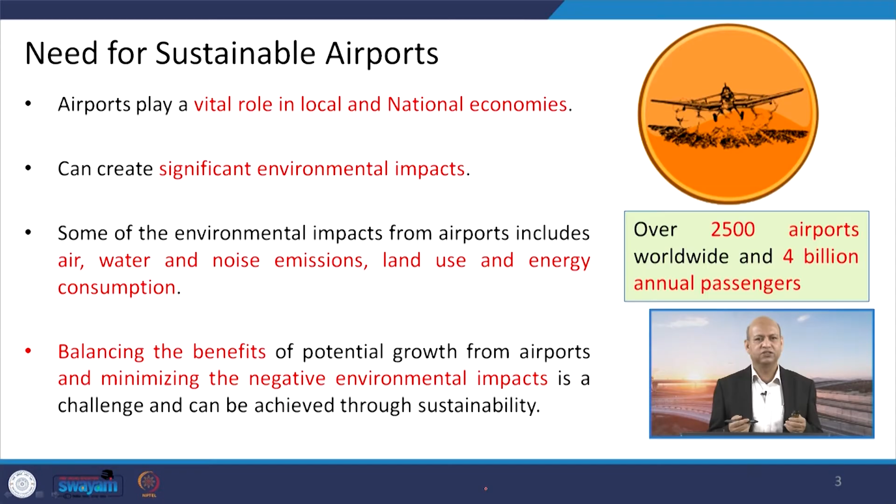Then what are the benefits? Of course they contribute to the economy, as goods and passengers are transported, so there is a constructive role in economics, but at the same time there are risks in terms of negative impacts. So we have to see the balance, a kind of risk-benefit analysis or risk-gains analysis, you can say.

If we want to see the environmental impacts in totality: congestion in nearby areas, because if the feeder system is not good, if approaching roads are not good, then at peak hours when people are travelling towards airports or from airport to their destination, there may be congestion in nearby areas. This congestion results in a lot of fuel burning, emissions, deterioration of air quality, and economic loss because of fuel burning.

Then waste handling, because wherever human activities are concentrated at a particular center, a lot of waste will be generated. There will be so many facilities like restaurants or restrooms, etc. So whether it is liquid waste or solid waste, there will be several waste streams, and we have to handle those waste streams properly.

Land use by airports requires huge land, several kilometers for air traffic, parking as well as runways, and then there are godowns or warehouses, and hangars for the airports. So many facilities, arrival or departure joints, and all those dimensions are there for a complete airport station.

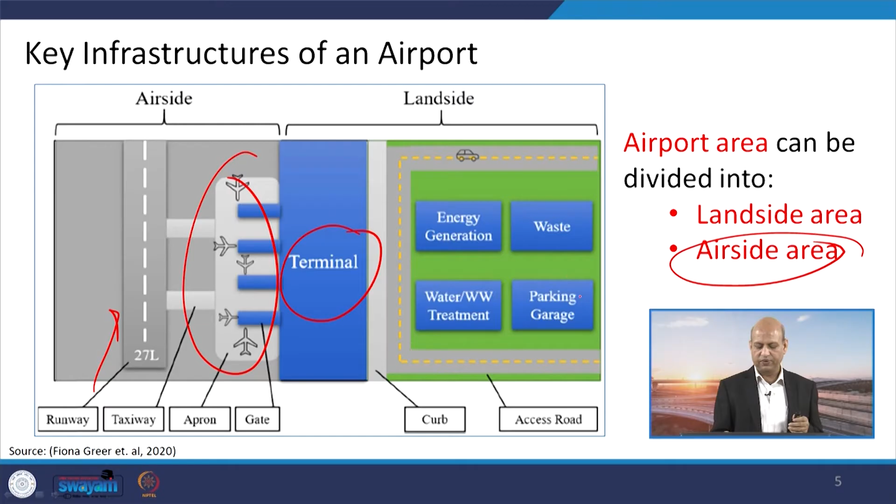If you see the key infrastructure of an airport, we can divide it into terminals, and then the airside area, where aircrafts are parked and passengers go inside or come out, and then there is the runway. And the landside area, where facilities are there for parking, waste handling, energy generation, and water and wastewater treatment - all those things are there for landside areas.

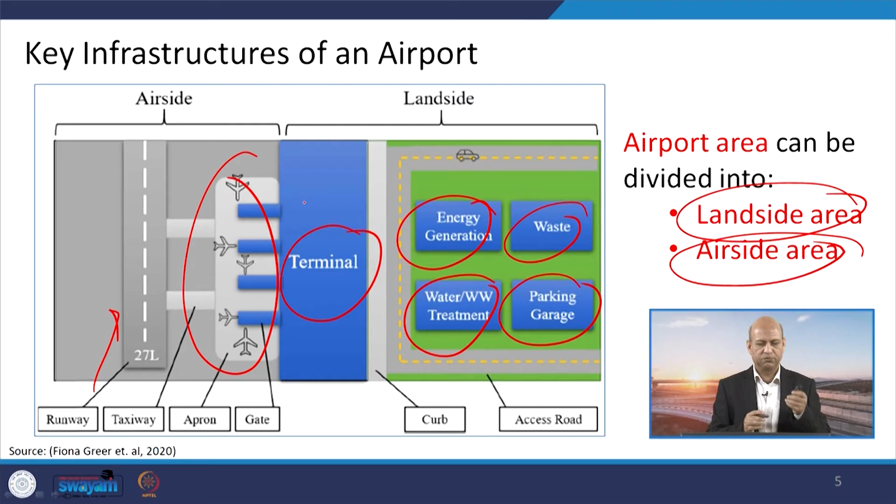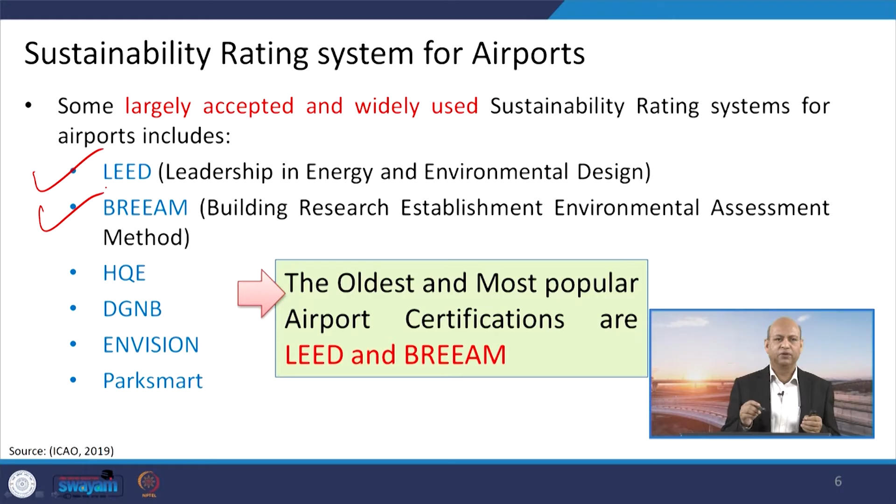You can see, beyond terminal, terminal is the bridge between this land side and air side areas. Then there are several rating systems for seeing whether it is sustainable or not, and there are two most popular and oldest kind of time-tested rating systems: one is LEED, that is Leadership in Energy and Environmental Design, and another one is BREEAM, that is Building Research Establishment Environmental Assessment Method. These are the two very popular rating systems that we will discuss in detail.

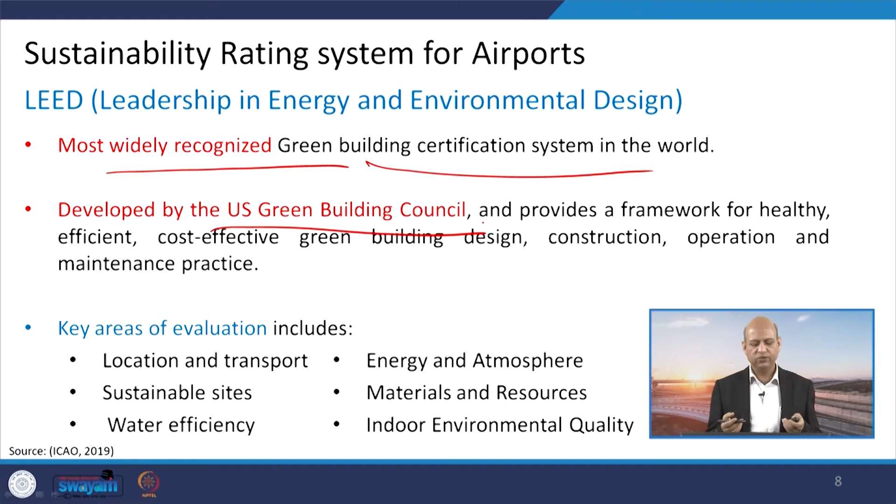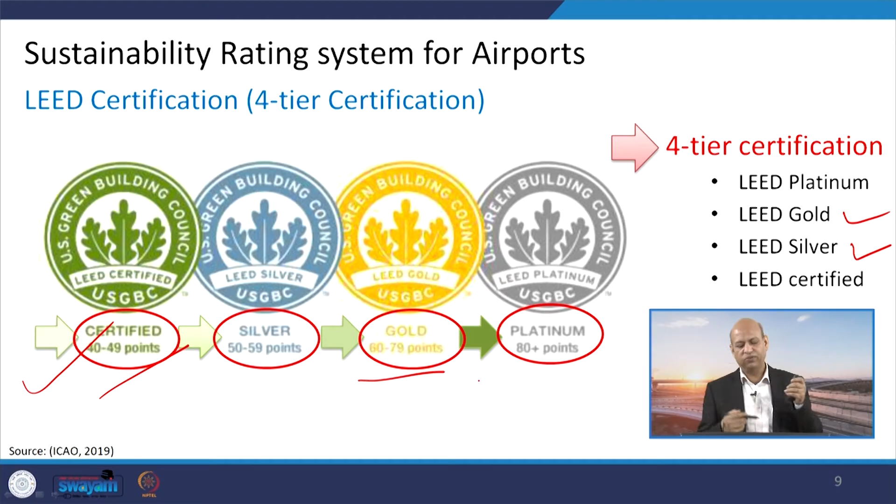How is it represented? It is represented in a very nice, attention-catching manner. If points are like 40 to 49 in that checklist, it is called LEED certified. If points are 50 to 59, it is LEED silver certification. The next one is for 60 to 79, that is gold, and platinum is 80 plus points. So this kind of 4-tier certification rating system is there in LEED.

The other parallel system, produced by UK Building Research Establishment, is BREEAM. This is also used quite widely, and particularly European countries use it frequently, and it includes 10 categories and 71 criteria. So it is quite comprehensive, you can say.

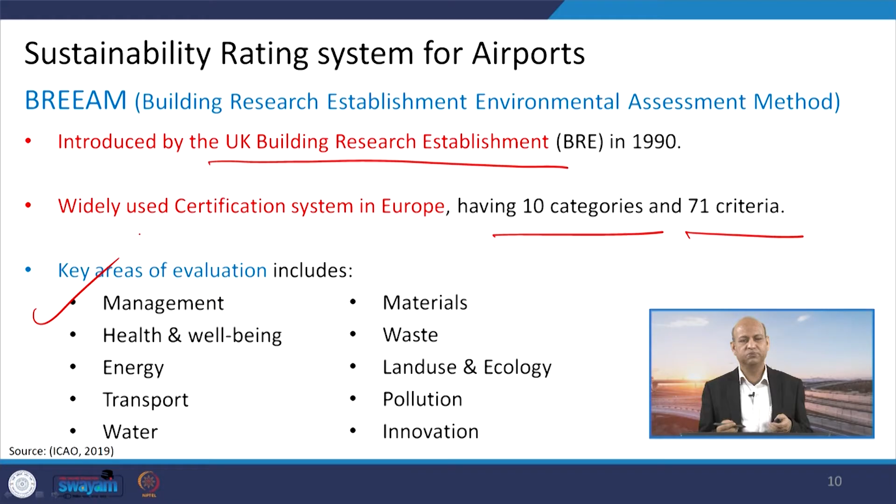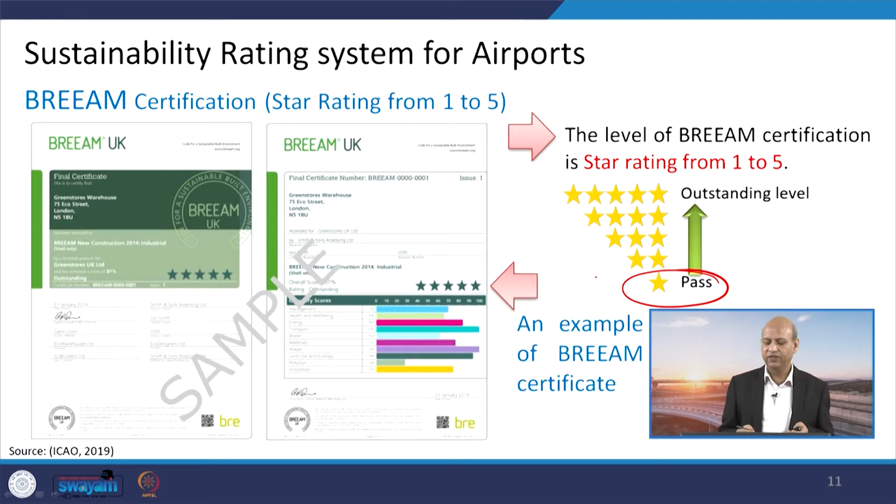One can easily see whether it is 5 star, 4 star, 3 star, 2 star, or 1 star just pass. So 1 to 5 star rating levels are there in this BREEAM certification system.

Okay, then we come to those features, those important aspects of sustainability in terms of airports. So what are those? Like energy and GHG emissions, meaning we will judge according to the energy consumption. If lot of energy intensive activities are there, then the airport may be kind of not so good, right.

Similarly, greenhouse gas emissions, if they are much more, that is not a good sign. But if measures are being taken by airport authorities to reduce greenhouse gas emissions and energy consumption over time, then we can say this airport is moving towards sustainable growth.

Then community, employee and passenger well-being, whether they are taken care of properly, is also part of sustainability. If working conditions are not good, people may not feel happy there, and slowly good people with more market value and employability will shift to another airport, so the airport loses good people. This is a kind of vicious cycle, more bad services lead to losing more good people, and that way it is a downward movement.

Water quality and storm water handling facilities, whether they are there or not, matter too. Then ground access and connectivity, if there is no good feeder system or last mile connectivity at the airport, that is a problem, because reaching the airport or going from the airport to a railway station, bus station, or other mode of transport requires good connectivity. If that is missing, it really reduces the airport's chances towards sustainability.

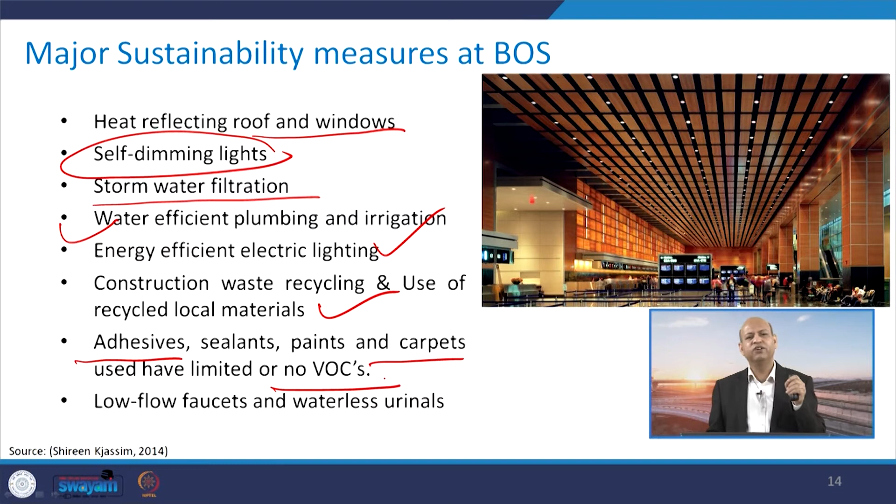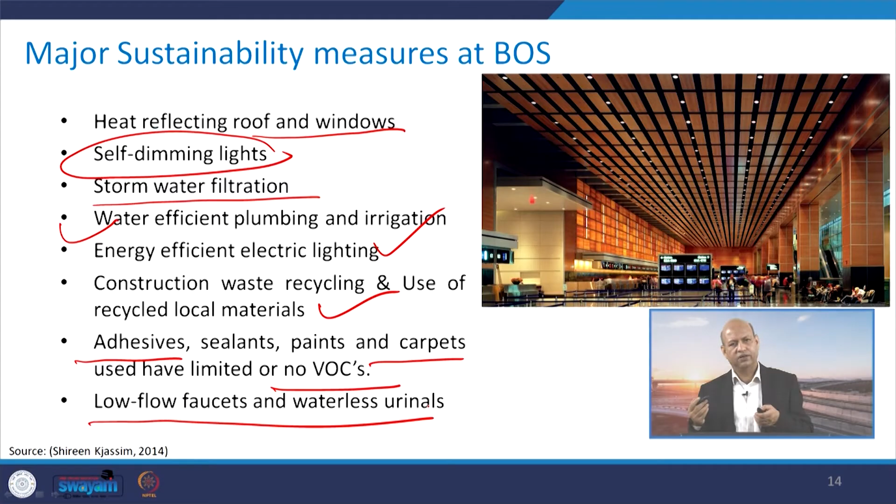Then there are low-flow, waterless urinals and similar facilities available these days. They are expensive initially, but later the operational cost is quite optimum.

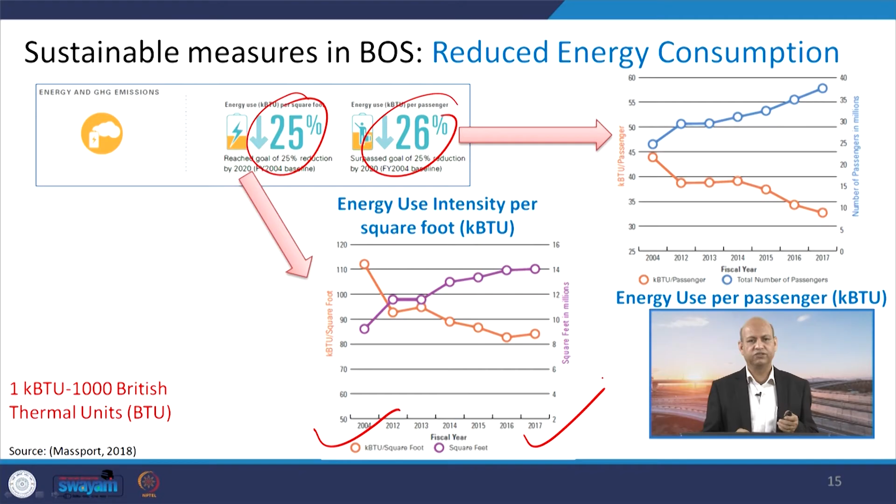Here you see interesting data, like energy use intensity per square foot of area and energy use per passenger, showing a reduction of around 25 to 26% between 2004 and 2017, meaning good practices are being adopted. At the same time, the number of passengers in millions is rising, but greenhouse gas emissions per passenger are decreasing - meaning even though more people are using these facilities and services, emissions per person are reducing, with a 46% reduction between 2002 and 2017.

So these are the indicators which show that they have used those kinds of technology and practices which are helping them to achieve less energy use and better services.

Similarly, greenhouse gases are emitted in a decreasing trend over the years from the building energy systems.

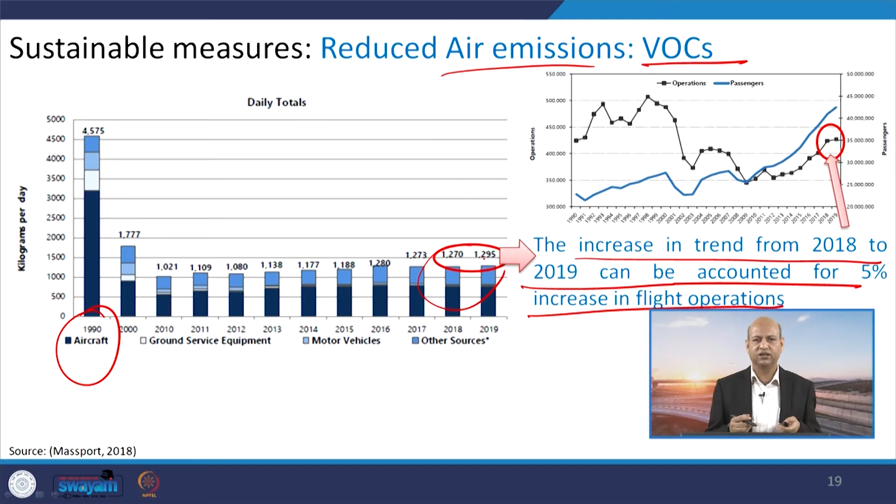Similarly, air emissions of VOCs were very high in the 90s, but later on they used materials, practices and technology which emitted much less VOCs. The increasing trend from 2018 to 2019 can be accounted for by a 5% increase in flight operations. So there is a slight increase, but because flight operations are also increasing, with more services and more passengers being handled at that airport, that is a very nominal increase, not a big jump.

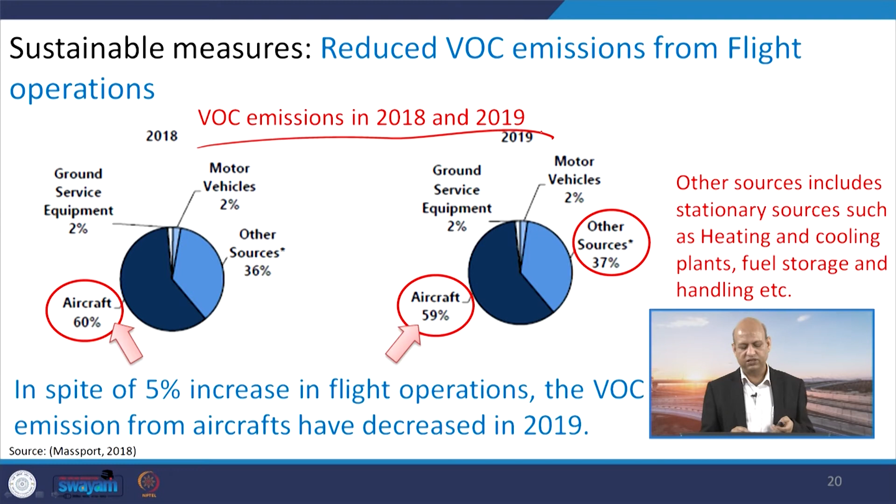VOC emissions means volatile organic compounds emissions. For 2018-19 it is almost similar, no much change, only like 60, 36, 59, 37. So there is only a change in one sector, but the total is not a very high change.

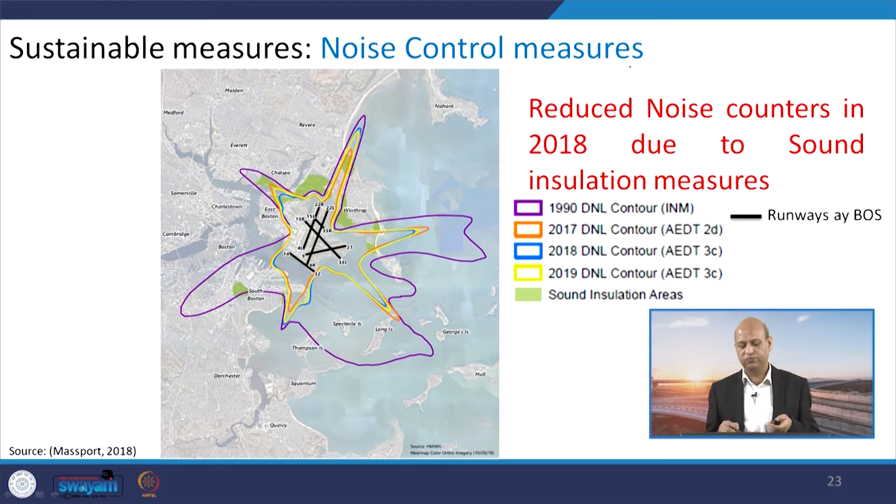Noise control related methodologies are there and they have put them in place in a nice way. The insulation system shown here graphically has been put in place, and permanent noise monitoring stations are also there, so that data can be analyzed and timely measures can be implemented if more noise is occurring at a particular location.

When we talk about waste recycling, waste recycling is also increasing every year, so more waste is being recycled every year.

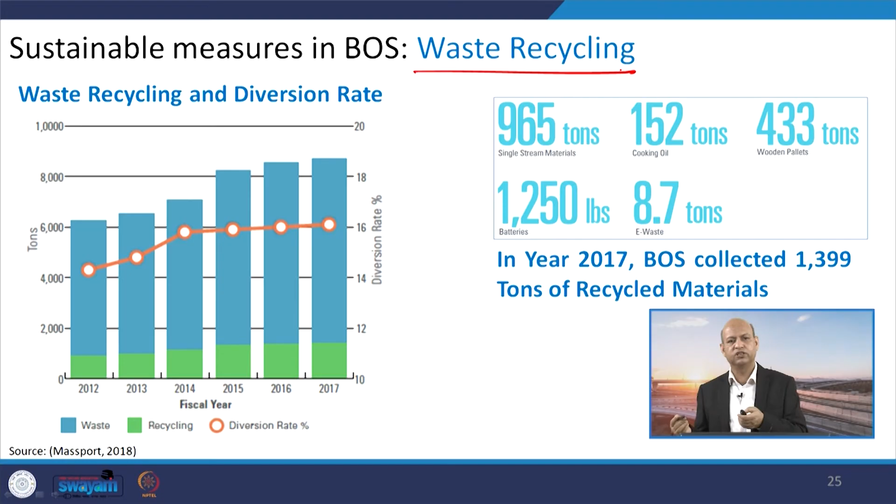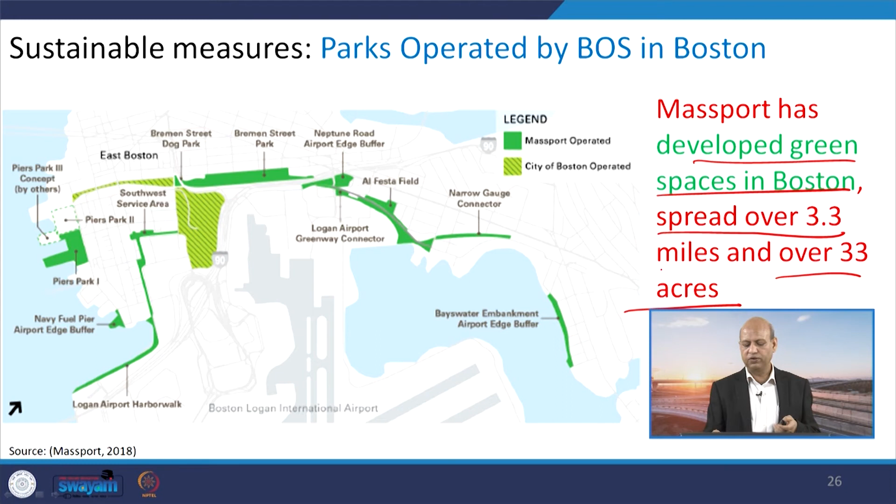Then if you see the green spaces in this particular airport, they are also spread over a quite large area - over 33 acres spread over 3.3 miles. So this is occupied by green area.

So that is again an environment friendly approach, along with public transport accessibility. It is very nicely linked with other public transportation systems, so the connectivity of different modes of transport is nicely networked.

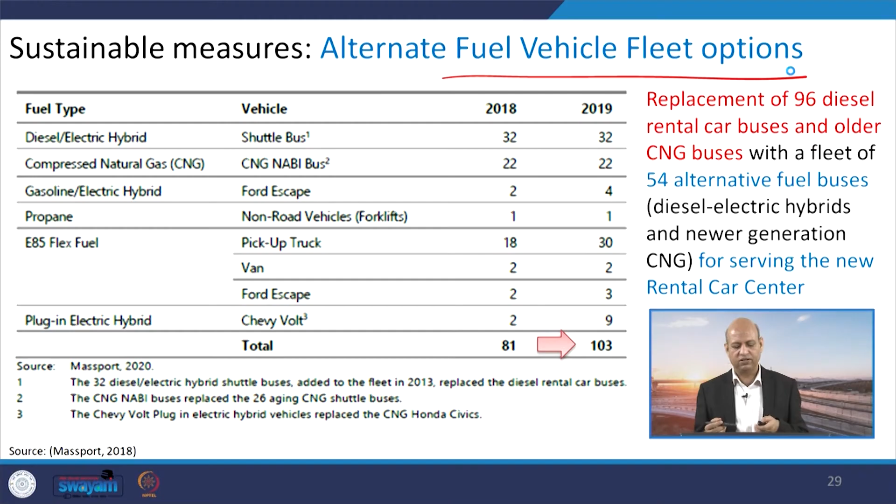Similarly, feeder buses or express buses are there to take passengers from the airport to other modes of transport and back. Alternate fuel vehicle fleet options are used, because hybrid buses emit less greenhouse gases or air pollutants. So those kinds of buses, or CNG, and nowadays electric buses and electric battery operated vehicles of many categories are put in place in these public spaces.

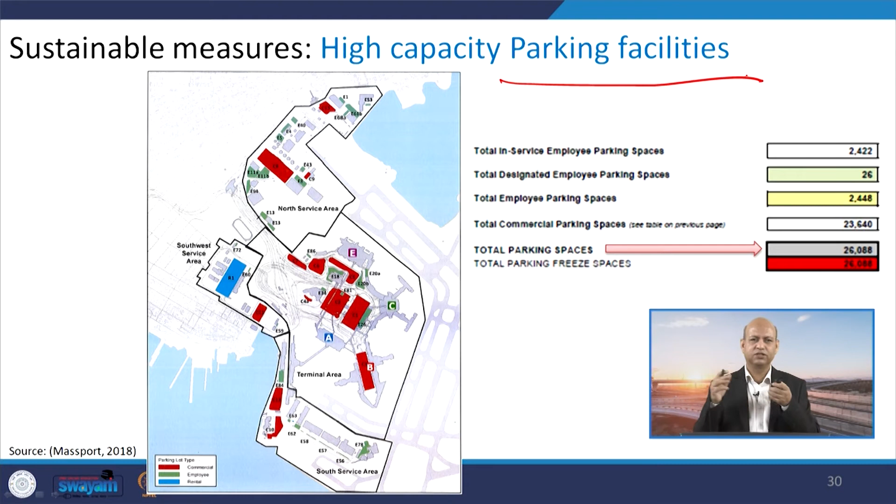Then high capacity parking facilities are there, so that vehicles do not move here and there - they just park and then access the airport. Similarly, high capacity parking facilities have increased over the years.

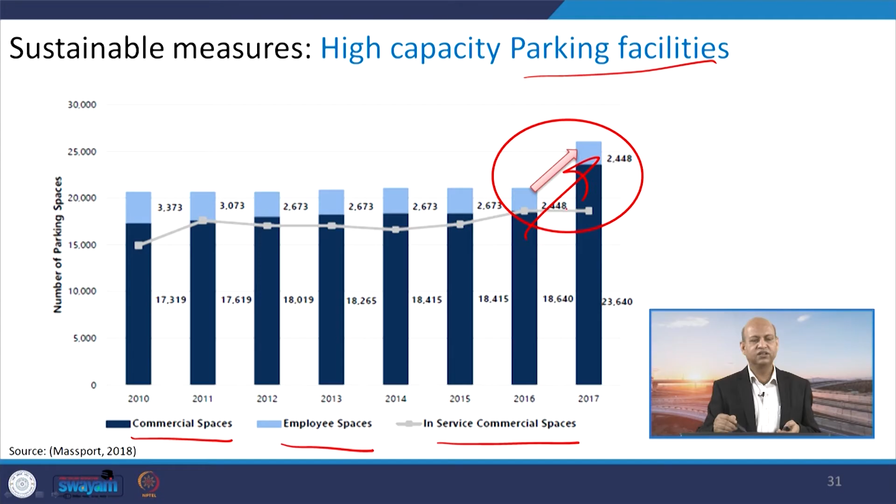So you can see these commercial spaces, employee spaces, in-service commercial spaces - the increasing trend is there. That means when more passengers are accessing, more facilities are there.

At the same time, non-motorized vehicles or bicycles and those kinds of healthy modes of transport are being encouraged for the public. So bicycle parking facilities are also there if somebody wants to park, if they are living in nearby areas, and people come there to work and can use bicycles also.

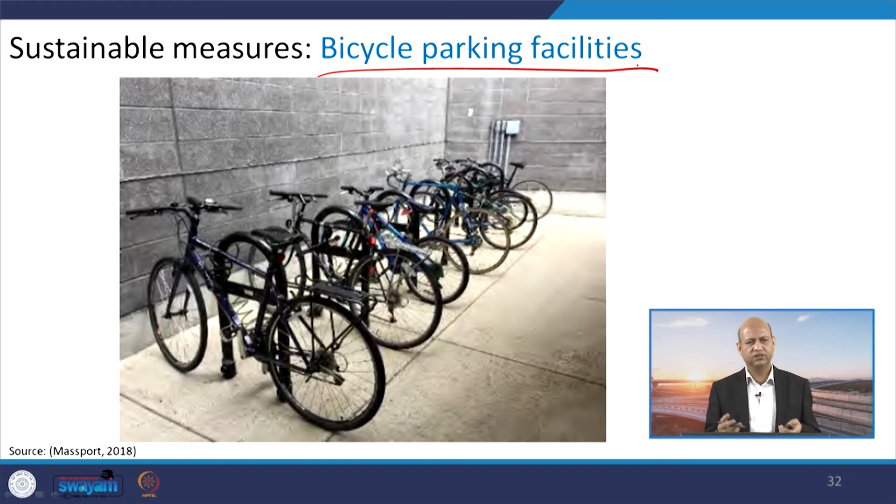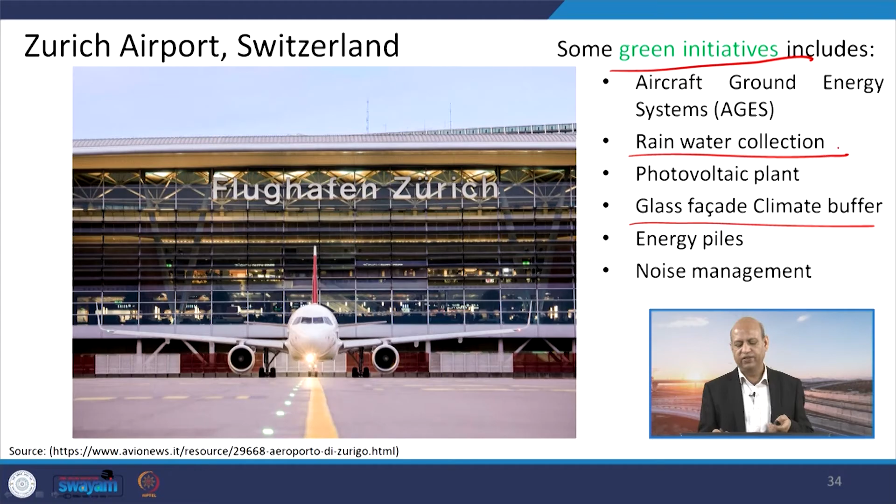When we talk about Zurich airport, some green initiatives there include glass facades, climate buffers related to the weather system, rainwater collection, photovoltaic plants, and more use of renewable sources of energy, as well as noise management - all these things are there in this particular airport.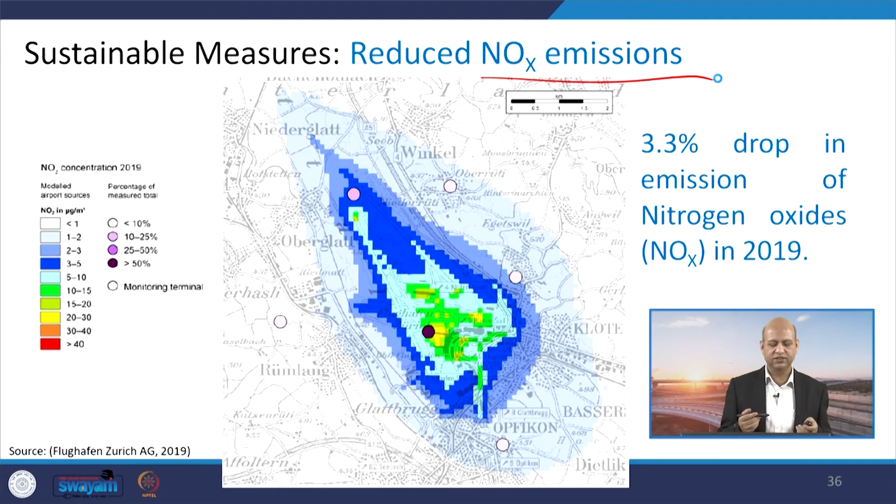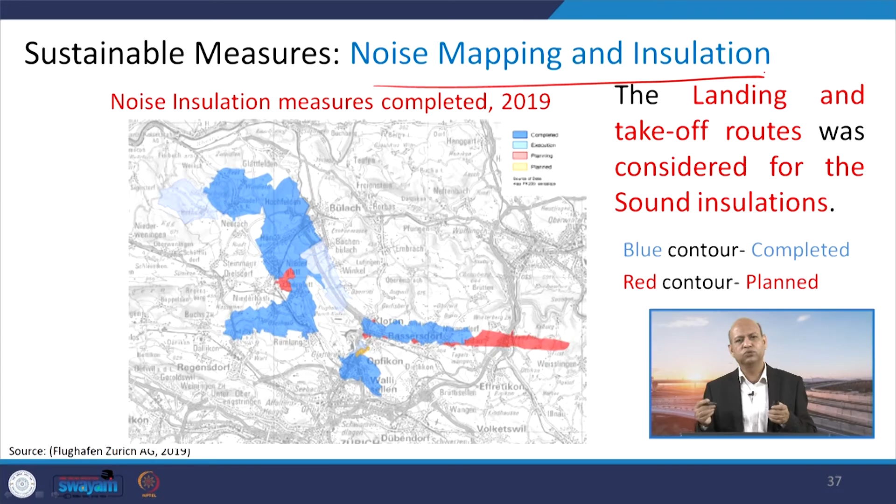So, they are harmful, and their reduction is a good sign in terms of air pollution management or air pollution control. Well, noise mapping has been there, and insulation related activities are taken care of during landing and takeoff routes, and those sound insulation areas have been managed in a way that wherever the source of noise is most, those particular areas can be insulated more profoundly.

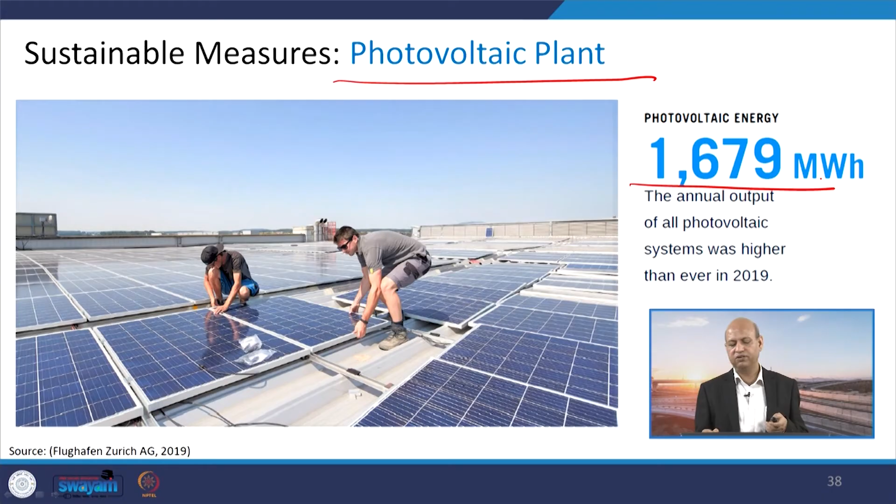Well, photovoltaic plants have been used for generating electricity and using solar energy. A very high amount, like 1,679 megawatt hours of energy, is being produced by these photovoltaic cells or plants.

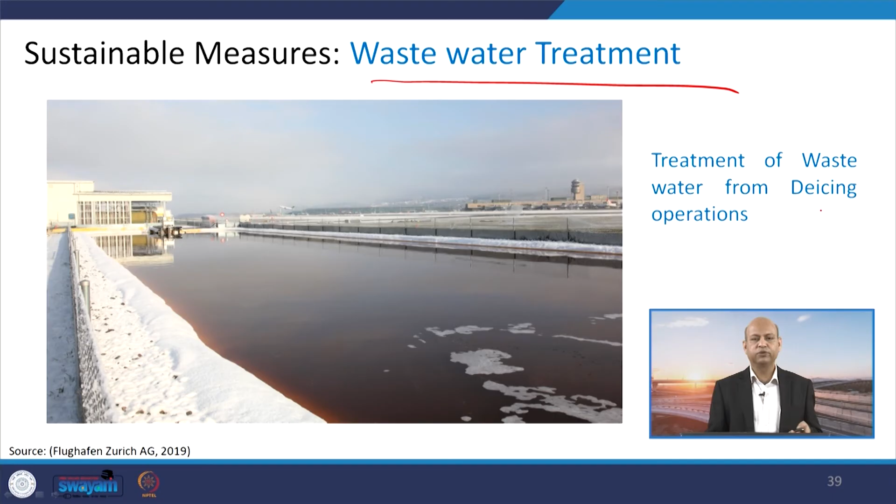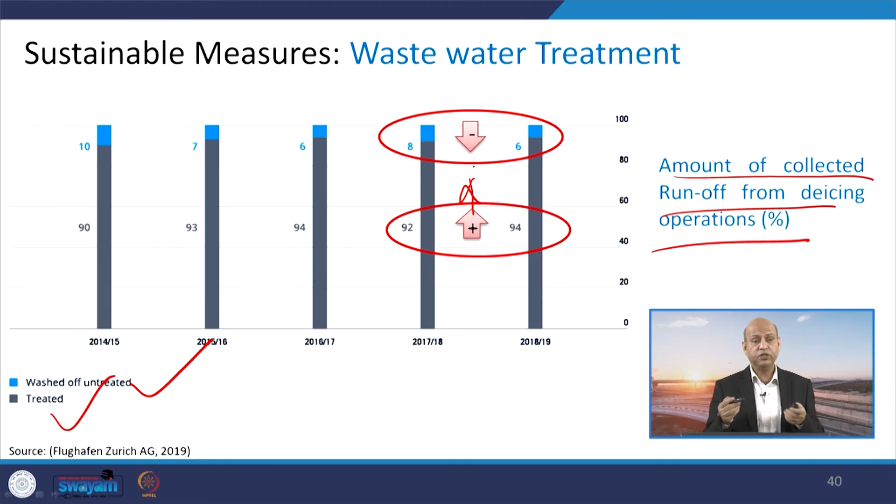Wastewater treatment during de-icing, that particular plant has also been used at that airport, and you can see the reduction in the amount of collected runoff from the de-icing operations. So, waste, untreated and treated. The treated waste is increasing, and untreated is decreasing, which means the capacity has been increased to treat the wastewater.

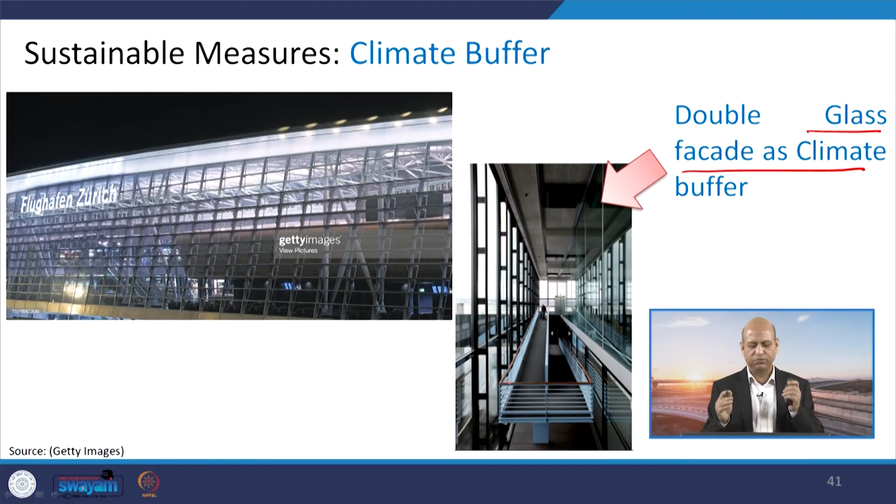There are climate buffers in this. Good glasses are being used, special double glasses, so that even if negative temperature is there outside, it will not affect the interior temperature. So, an air cushion is being used between two walls, those kind of practices are being used.

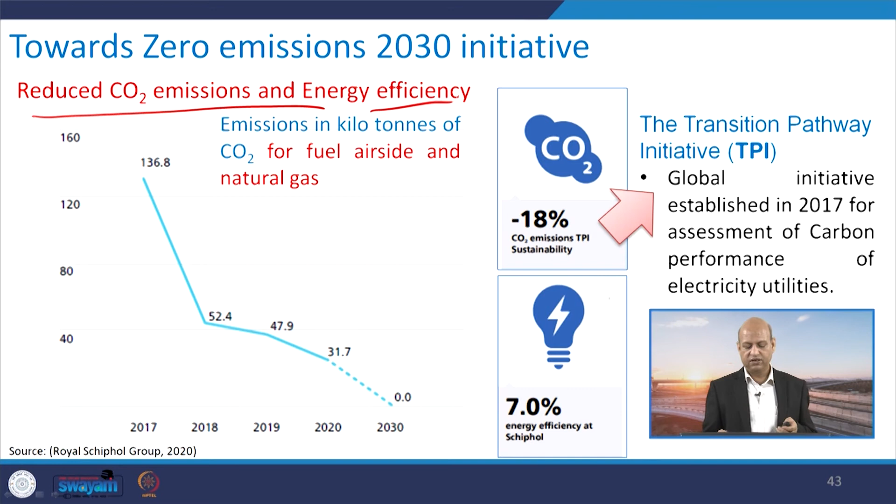In Netherlands, this Amsterdam airport is also rated LEED Gold and BREEAM Excellent, that kind of rating system it has achieved. And you can see why, with reduced CO2 emissions and energy efficiency. It has around -18% CO2, meaning it has reduced, and energy efficiency has also been achieved.

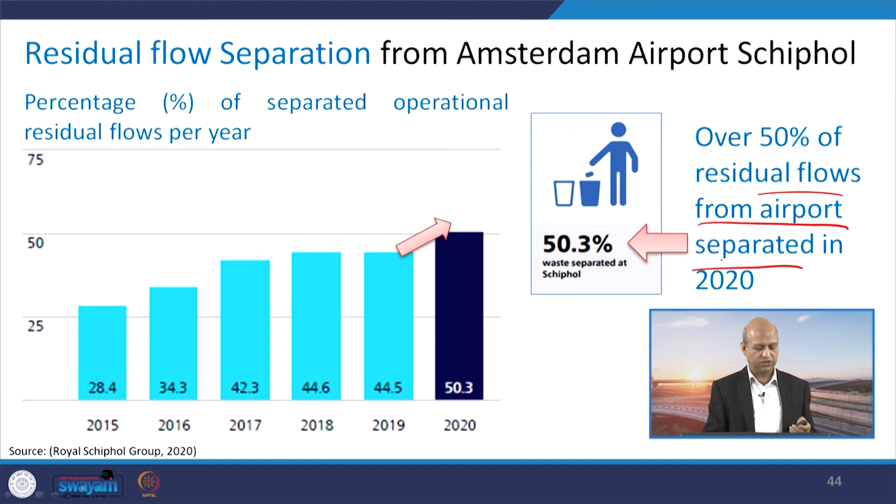Well, then around 50% of the residual flows from the airport, these wastes, earlier it was only 28%, now it has increased to 50%. So, that much of the residual waste is being handled at the source, segregation being achieved.

When we look in the Indian context, there are good airports like Rajiv Gandhi International Airport, Hyderabad. This has green status airport rating, and it has achieved 25% savings in energy consumption and 30% savings in water usage, and 100% wastewater is being used for several purposes like landscaping, air conditioning, and flushing of toilets etc. So, you can see all this greenery is being irrigated by recycled water.

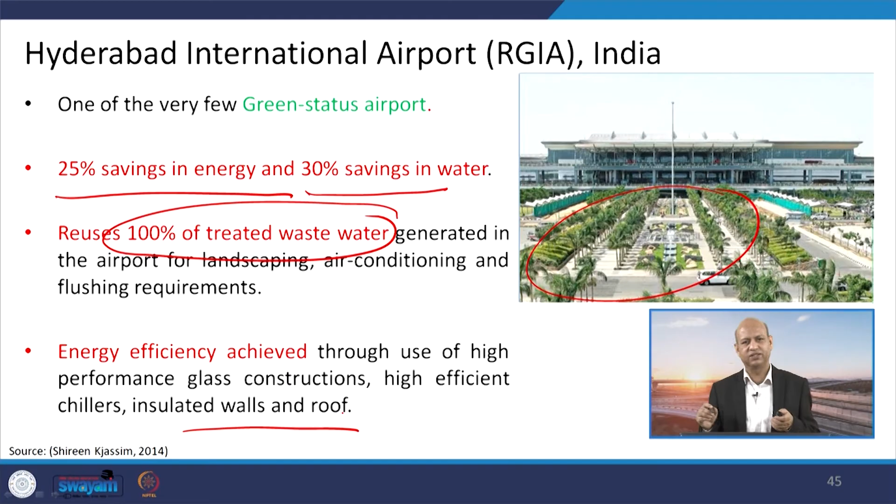Energy efficiency is achieved by good glass construction, because with daylight coming inside, you do not need much interior lighting, and insulated walls and roofs are there so the weather does not affect the interior temperature. So, that is a good way of managing energy systems.

Well, what are the different measures or means for sustainability of this Hyderabad airport? You can see soil conservation, 100% rainwater harvesting, 100% grey water treatment from our common facilities, then fresh air management, and 23% energy saving, which is being achieved in terms of better management of the air conditioning system.

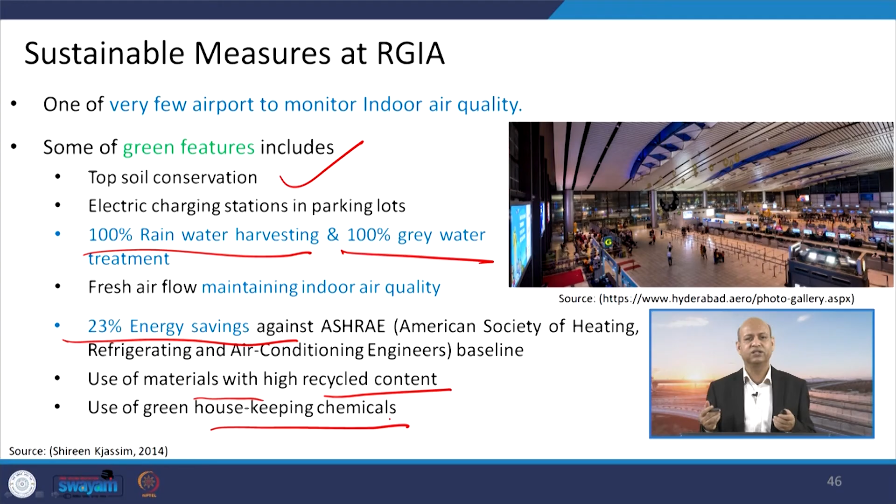Material flow, recycled content, housekeeping chemicals - all these things have had a proper inventory prepared, and wherever they can save chemicals or save energy, that kind of management system has been put in place.

Well, in terms of energy conservation, solar panels have been used, and lighting from solar power is being used on a large scale. So, when we are not using lighting powered by electricity generated from fossil fuels, and instead using solar energy, that is a big achievement towards sustainable energy resource usage.

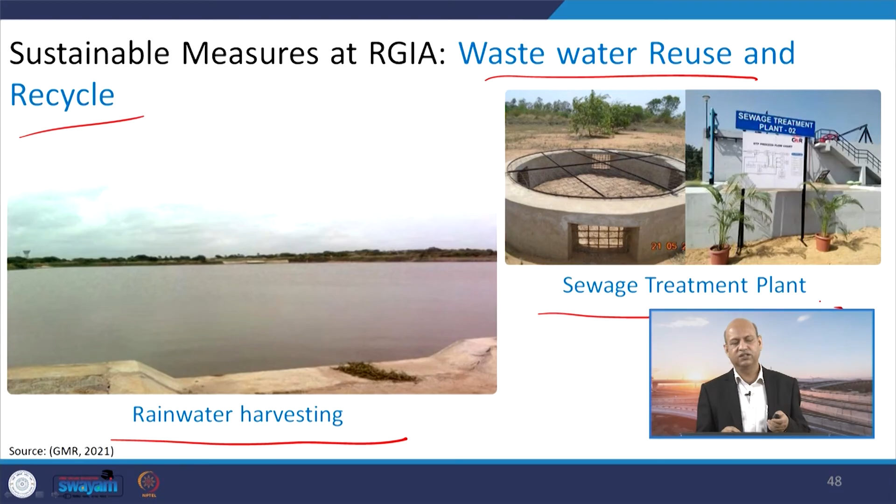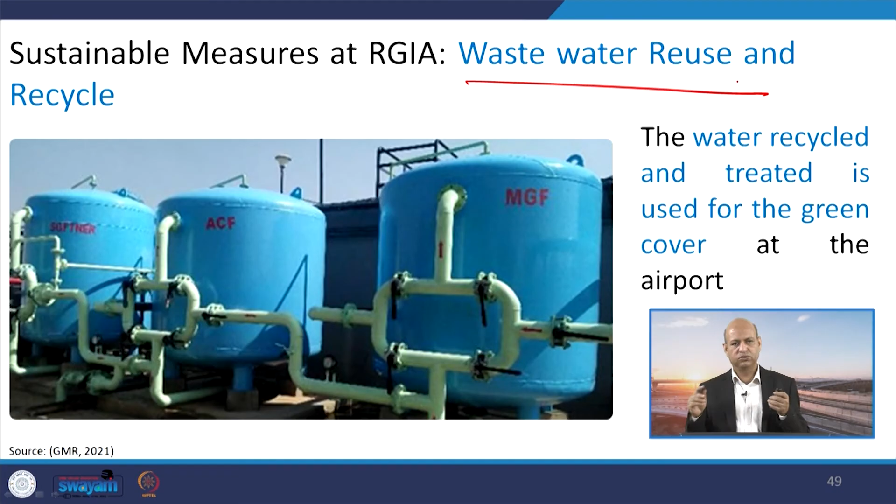Well, wastewater reuse and recycling has been achieved because rainwater harvesting is there and the sewage treatment plant is there, functioning optimally. This wastewater reuse and recycle system is managed properly, so no wastewater is just discarded - it is completely used at the airport.

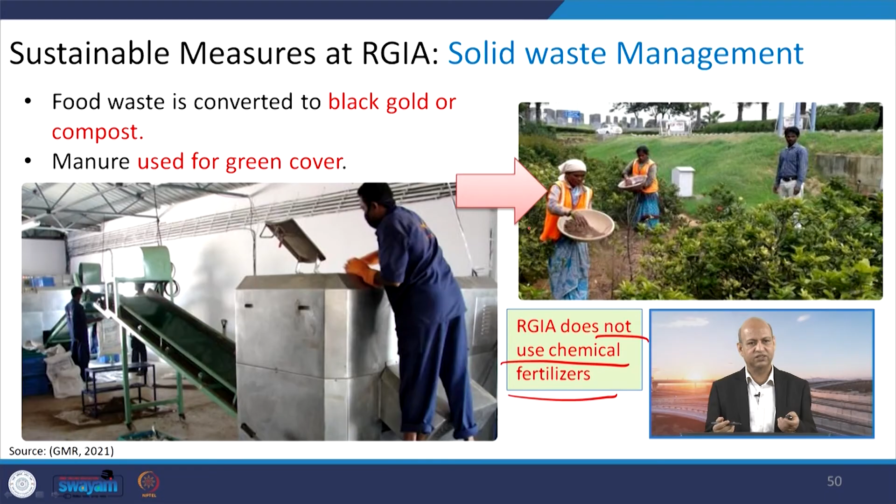And there is some composting, meaning there is no use of chemical fertilizers. All this greenery and landscaping is maintained by compost, which comes from the treatment of waste generated there, organic waste etc. So, those kinds of best practices have been adopted at that particular airport.

The next is Indira Gandhi International Airport at New Delhi. This is the 8th largest terminal in the world and the largest building under one roof. This ranking goes across the world, and it is the first carbon neutral airport in the Asia Pacific region. It is LEED Gold certified, IGBC Platinum certified, and the world number 1 airport in terms of service quality. So, there are different ways of ranking airports.

In service quality it has got the number 1 category or ranking at global level, and this is the first airport which got ISO 50001 certification for several other services.

Sustainable measures at IGI Terminal 3, the biggest terminal, have so many counters that there is no crowd, with 78 aero bridges and 3 runways, so congestion possibility is not there. There is also integration of feeder systems and efficiency in terms of reduction of air pollution emissions.

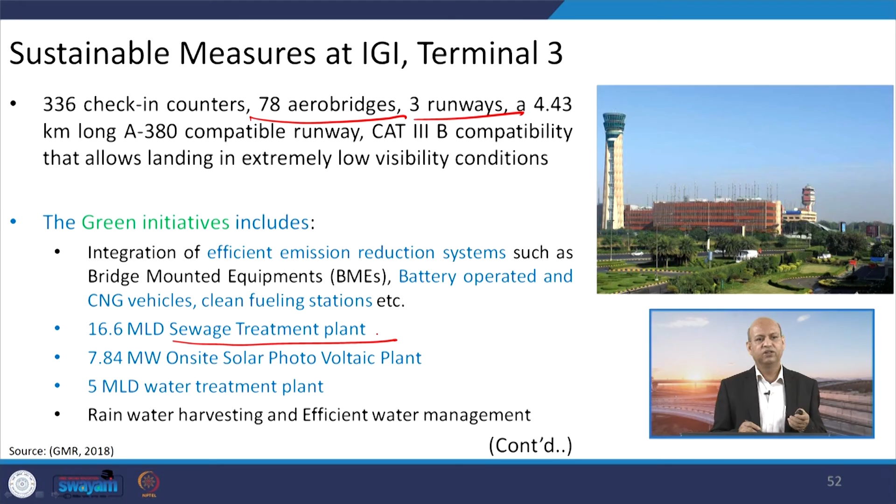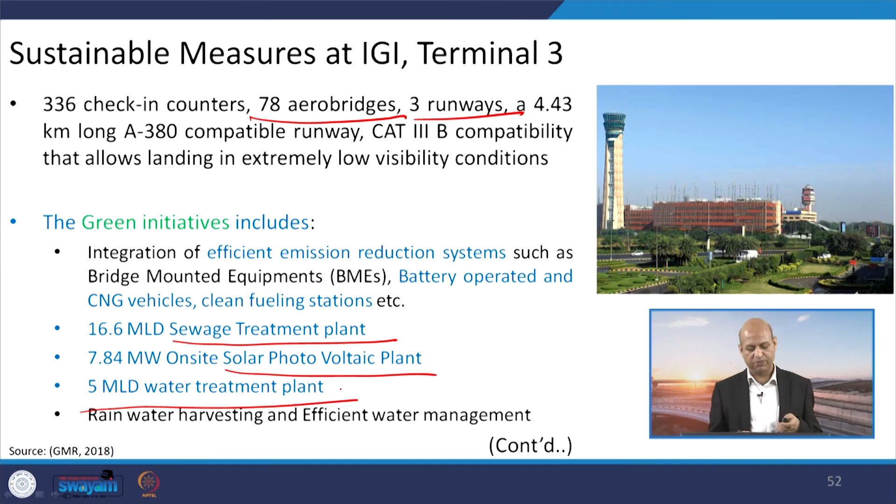Battery operated vehicles are quite large in number. A sewage treatment plant of around 17 MLD capacity is there, a solar photovoltaic plant, a water treatment plant of 5 MLD capacity, plus rainwater harvesting and water management systems. All these systems are there in IGI airport.

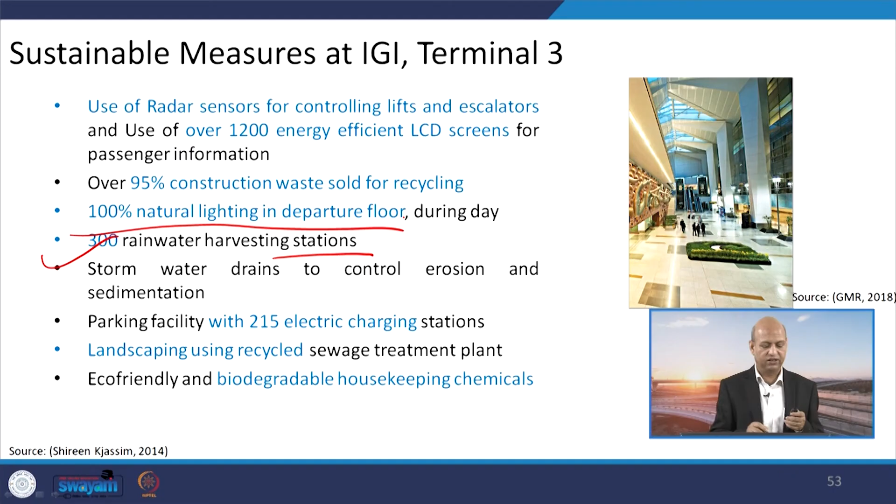There are 300 rainwater harvesting stations within that terminal, and 100% natural lighting in the departure floor, which is a wonderful design. Also, 95% of construction waste is sold for recycling.

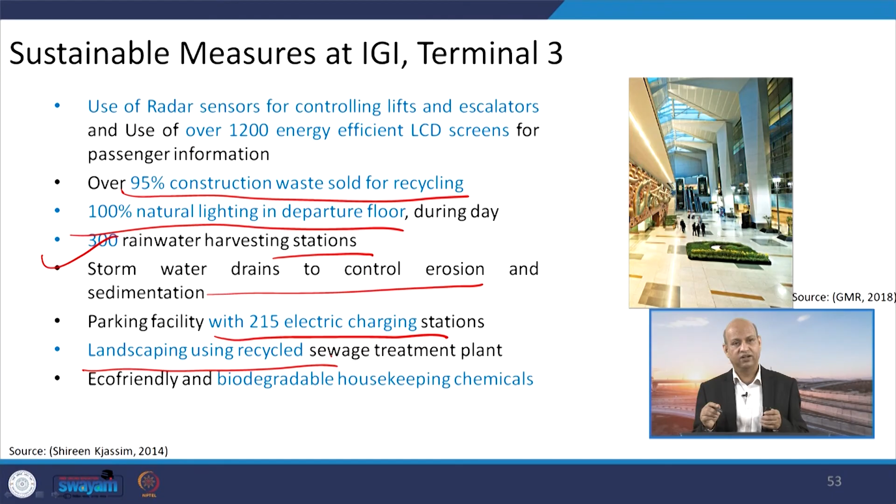So there is no wastage for landfill; it has been sold for other uses, a waste to wealth approach. Stormwater drains control erosion and sedimentation with proper design, not just open drains. There are 215 electric charging stations, and landscaping uses recycled sewage treatment plant water, that is treated effluent, along with eco-friendly biodegradable housekeeping, as we have seen in the case of Hyderabad also.

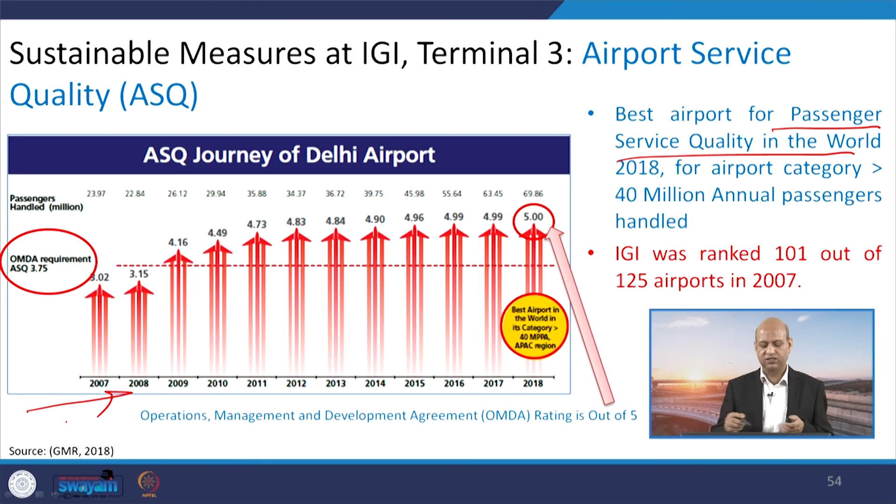IGI airport has the tag of best airport for passenger service quality in the world. It was ranked in that way by several ranking systems, and over the years it has provided good quality and sustained best practices in terms of service quality.

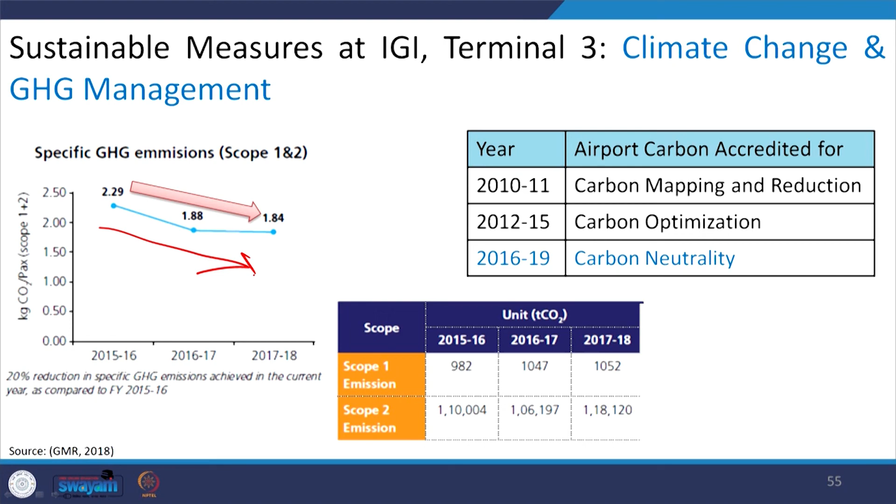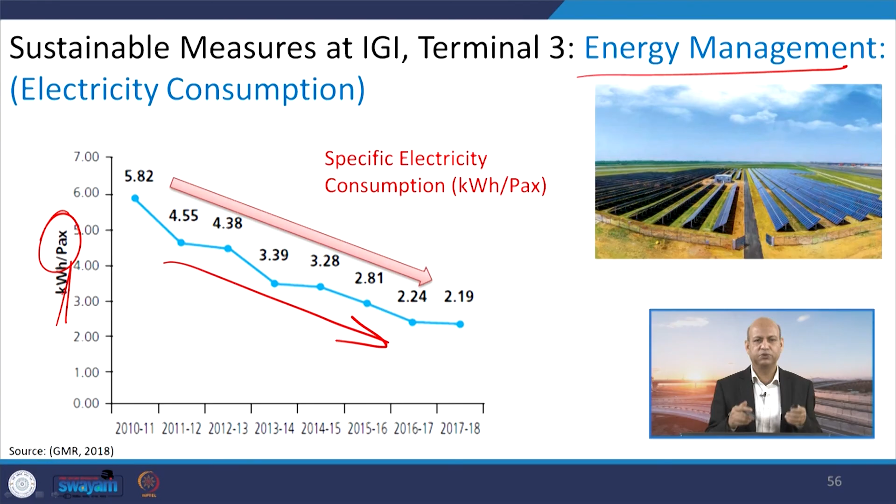Energy management is good; energy consumption is decreasing in terms of kilowatt hour per passenger. So even as passengers are increasing, energy management is such that it is becoming less intensive, and per person consumption of energy is decreasing over the years.

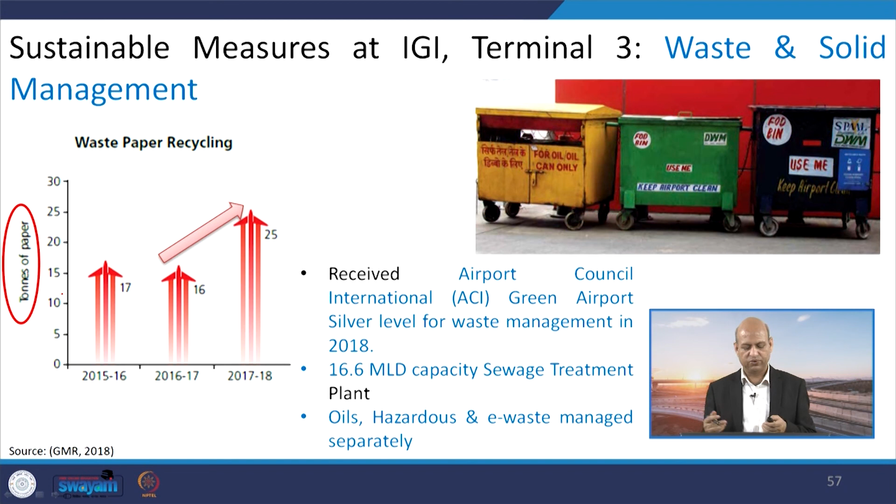Waste paper recycling is increasing, which means good practices for collecting and transporting for better disposal are in place.

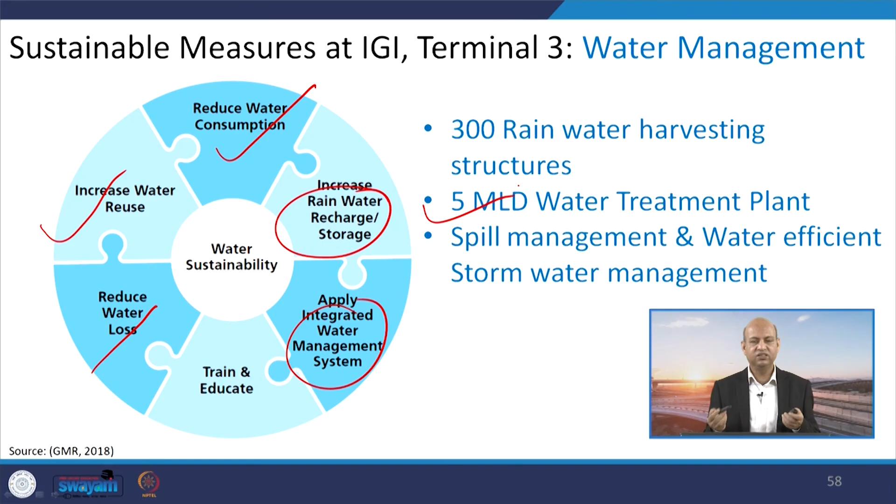Overall, there is reduced water consumption, increased water reuse, and reduction in water losses, with integrated water management systems where rainwater recharge and storage are increasing. 300 rainwater harvesting structures have been constructed, a 5 MLD water treatment plant is there, and spill management and water efficient stormwater management are in place. All these go towards best practices of water management.

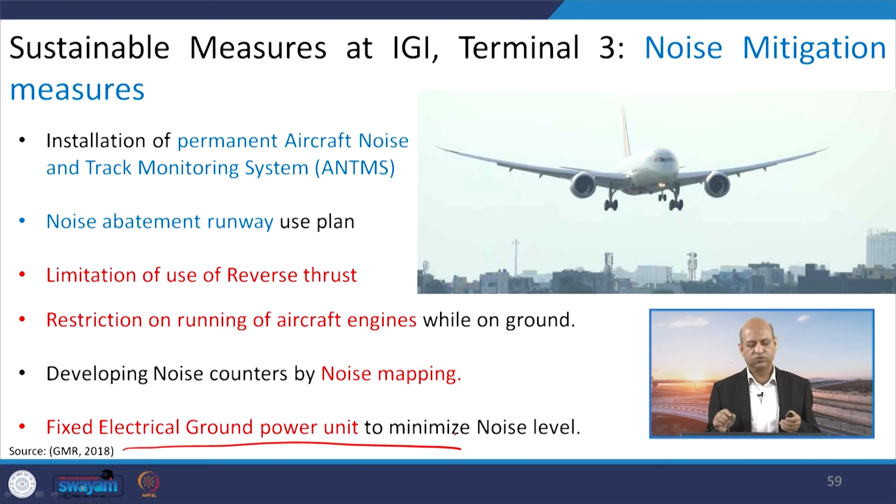In other aspects like ISO management systems, green infrastructure program, green company framework, and compliance verification program, all those best practices are there at IGI Terminal 3.

In conclusion, there is a lot of opportunity for these airports where a lot of movement of goods and passengers occurs. In construction activities, designing, and operation, from planning to operation stages, if all kinds of best practices are used, good ranking or rating can be achieved by those airports, and they become known for their sustainable work practices.

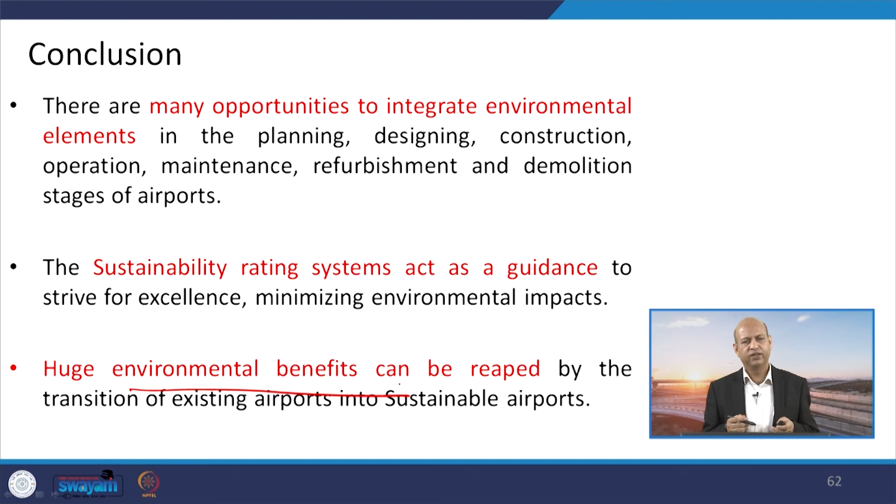Some excellence aspirations exist because airports compete with each other in terms of service quality and environmental implications, using expert services to achieve good environmental practices. Huge environmental benefits are reaped by these practices, and perception also increases, so more people come to use the services of that airport. This is a win-win situation, attracting people while giving good services to the country and society with minimum impact on the environment.

This achieves the sustainability aspects or sustainability growth of the public transportation system in terms of airports.